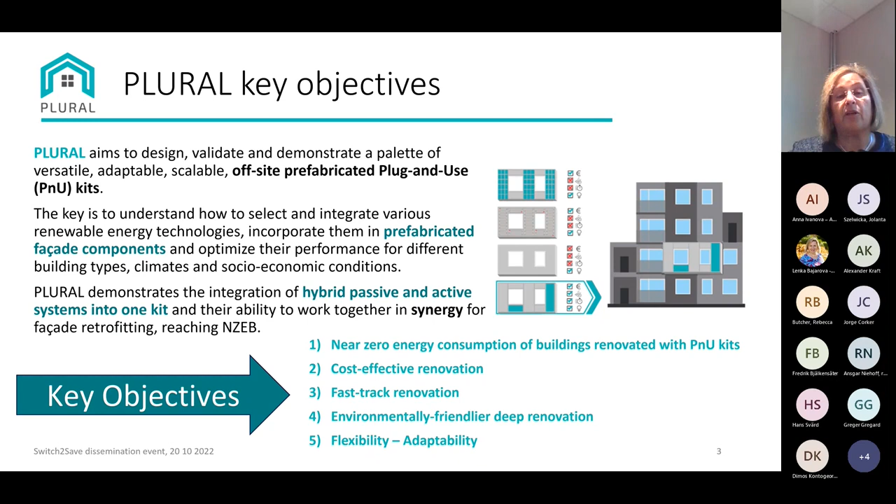We are developing basically three different types of PnU kits, plug and use kits. One is called Smart Wall, the ConExWall, which combines a wood facade with external wall heating and cooling system, and the hybrid wall, which is based on a folding facade that integrates an advanced heat and cool recovery kit. I will show briefly to you in a minute how these kits look.

In parallel, we are developing a digital platform which integrates the BIM models of the demonstration buildings with the specific technical characteristics of the PnU kits and key performance indicators that are developed as part of the project to prioritize the requirements and the needs of different decision makers. Decision makers can be architects, can be real estate, can be the user of the building.

And the aim is to develop also a decision support tool that, taking into account the BIM, the monitoring performance of the building, the BIM models of the IFC files of the kits, and via this decision support tool to be able to support the decision making, which of these technologies is best to be implemented in a building.

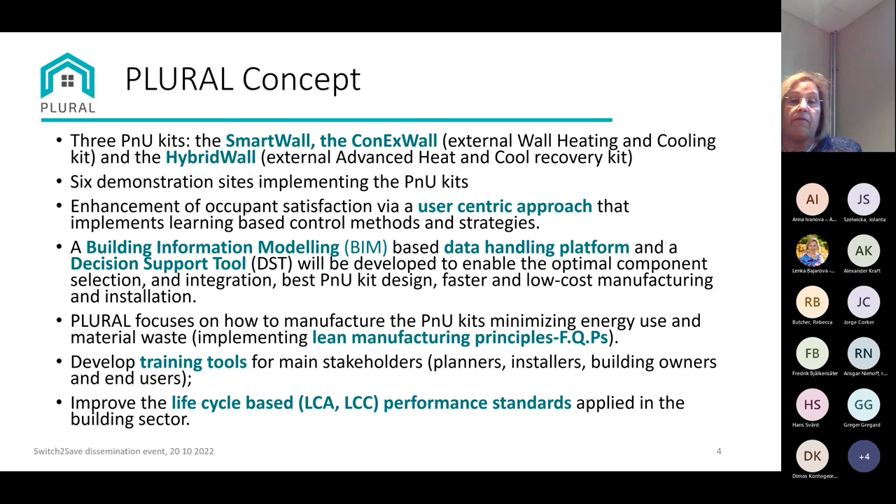Of course, in parallel, we have training tools, and one also specific issue of this project is the manufacturing. We have a whole work package which deals with how to optimize the manufacturing of these prefabricated kits, combining the BIM platform with the manufacturing, giving order from the BIM to the manufacturer what and when and how to manufacture, and of course applying the lean manufacturing principles in the factory quality procedures.

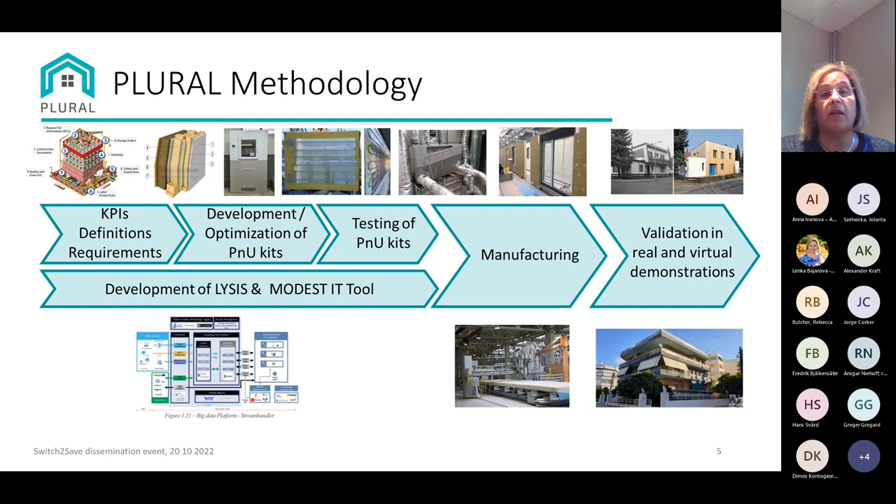So this is an overview of the methodology. We go from the definition of the key performance indicator to the development of the kits, testing, manufacturing, and validation in real demonstrators. This is an overview of the three kits, the smart wall, which you see on the top.

It's a multi-component kit based on a metal frame that integrates a PV panel together with a fan coil and a smart window, which I will talk a little bit more about in the next slides, plus a control system, which we call control toolbox. So the control system takes into account the indoor conditions, gives order to the heat pump that drives the fan coil to switch on or off, and also to the smart window, and of course takes the power from the integrated PV panels.

This module can be produced in different forms, with or without window, with door, plain, and can be used indoor or outdoor. The one you see in the middle, the so-called hybrid wall, is based on a commercial technology of a Spanish company called Denvelopes.

This is Denvelopes, which produces folding facades. What you see here in blue and light green, or the beige and red, are panels that are folding, and they are transported folded to the building site, and then they are unfolded and they go on a frame, and they create a facade

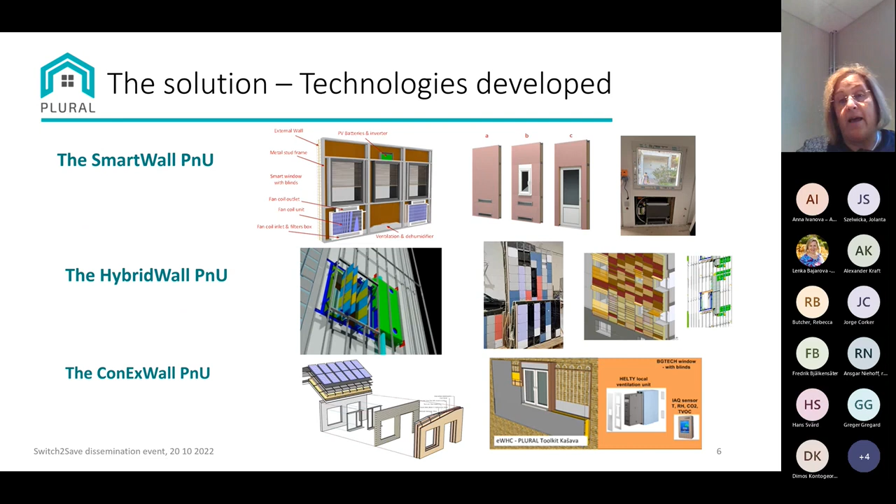Fitting a prefabricated module like the ones we are developing to the actual building is really a challenge in terms of dimensions, hanging, transportation, a lot of small things that have to be taken into account. And I can tell you that BIM helps a lot in this direction, because you can have all the information you need. And for the renovation buildings that we have, all the buildings have been scanned with 3D laser scanning technologies. We created the point clouds, and then we created the BIM out of this, and out of this BIM, we gave instructions to the manufacturers on how to manufacture these prefabricated kits.

Now, probably it's a little bit more interesting for us as part of the Switch2Save project to see a little bit what we do in terms of smart windows. We have a partner who is developing a technology of a triple pane low E window, where they place the anti-reflective coating in different locations within the triple pane, and they circulate air, which is driven from the outside, within the panes, and in this way they can save a significant amount of energy. You see on the top picture the inlet and the outlet of the ventilation which goes through the panes of the window.

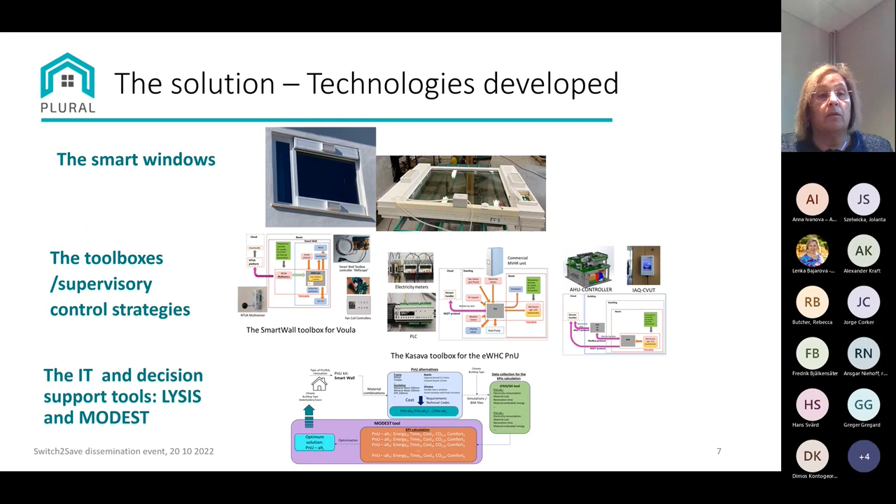Apart from this, we integrate in all the windows heat recovery systems and the ventilation systems. In the middle, you see a representation of the so-called toolboxes, which are necessary for all these kits. And these are the ones that combine the control of the panels plus the control of the building, and they try to make them collaborate. And the IT tools, I don't want to take too much time.

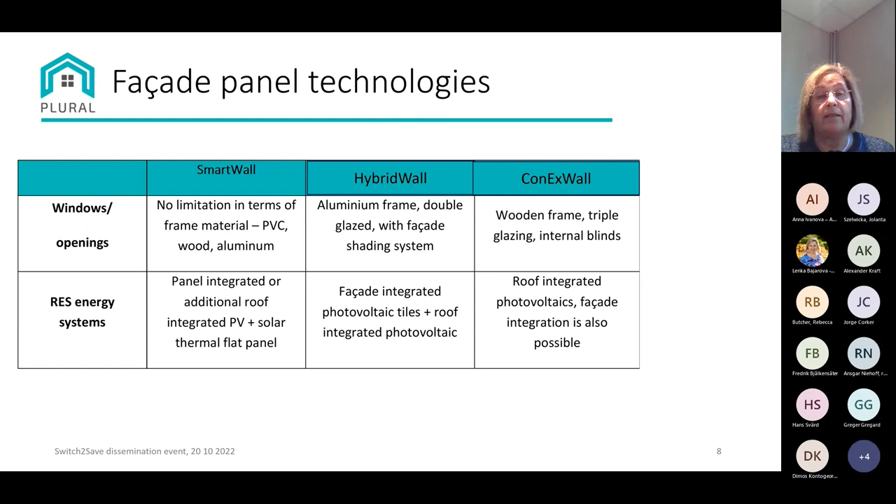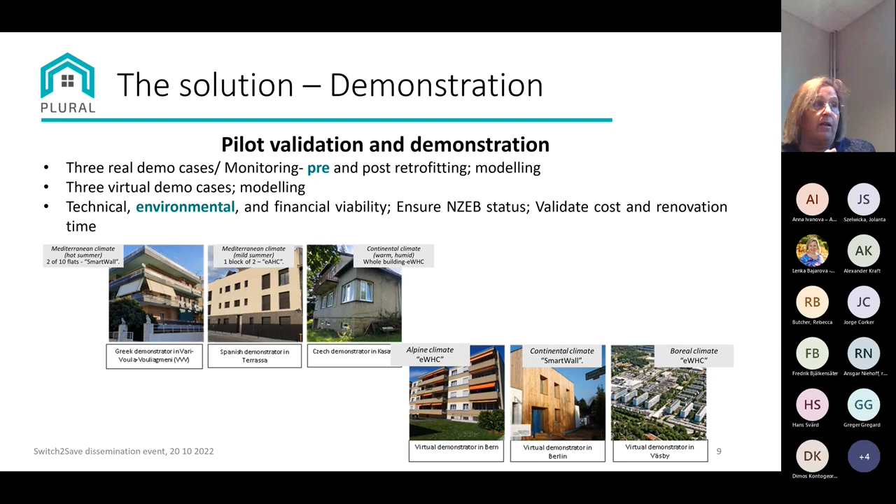And last but not least, we have a big demonstration site in Sweden, Väsby, which as far as I know, it's an area which is kind of protected. It's a typology of buildings built in the late 70s. And there we are going to install again the prefabricated wooden facade with the hydronic system because of the weather conditions. So as I said before, each of these PnU kits addresses different climatic conditions and different building typologies.

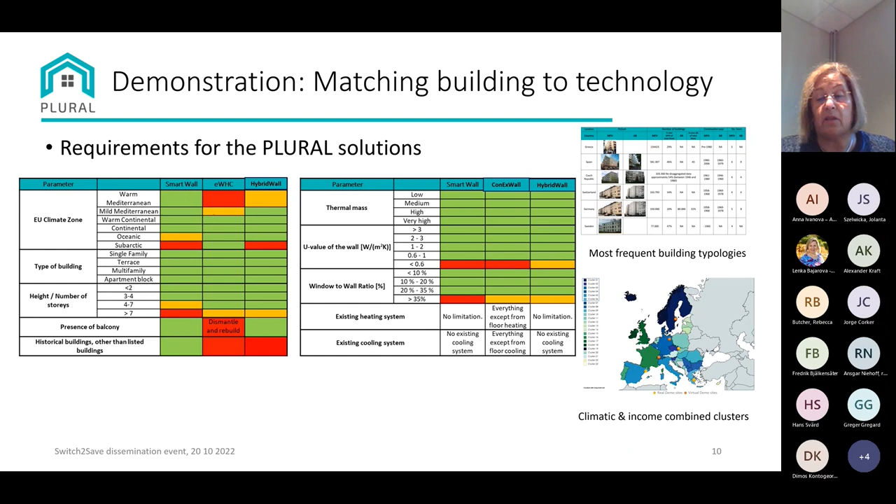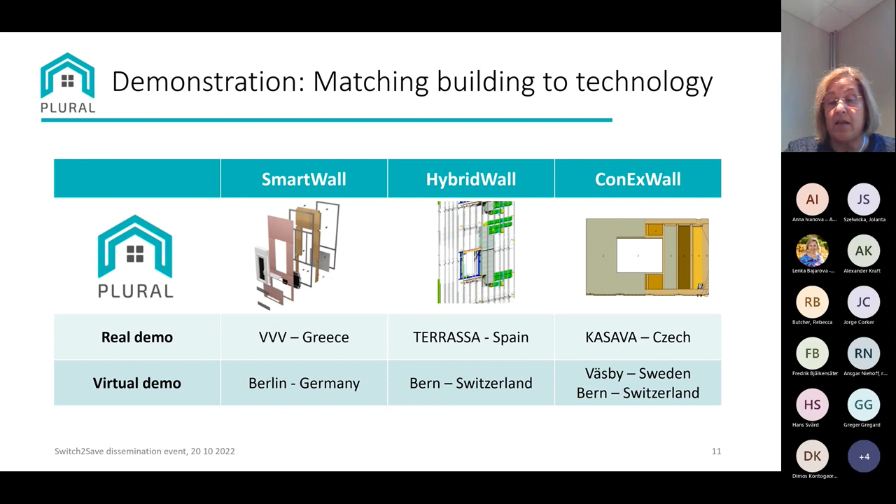This is a pictorial representation of what I said before in terms of installation of the 3 different PnU kits to the real and the replication demonstrators. A few representative examples of what we do in the frame of the project. We have a very extensive testing campaign where we look at the building physics and the thermal performance of these PnU kits via measurements and simulations.

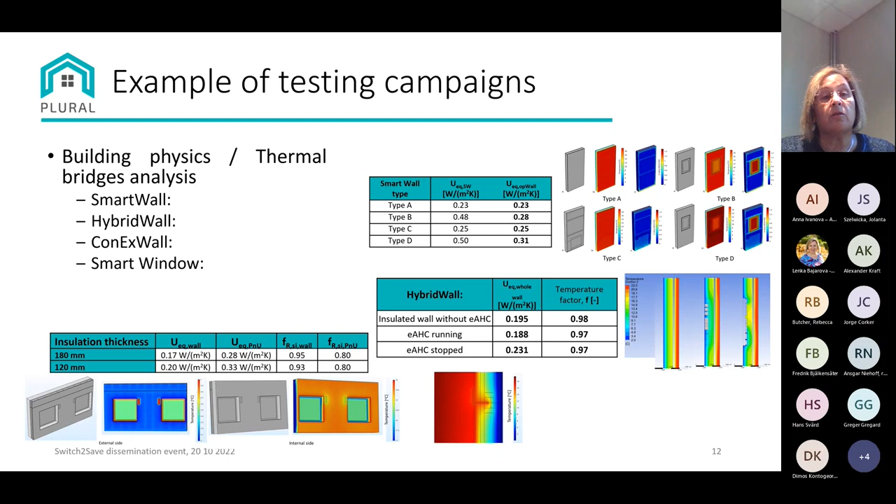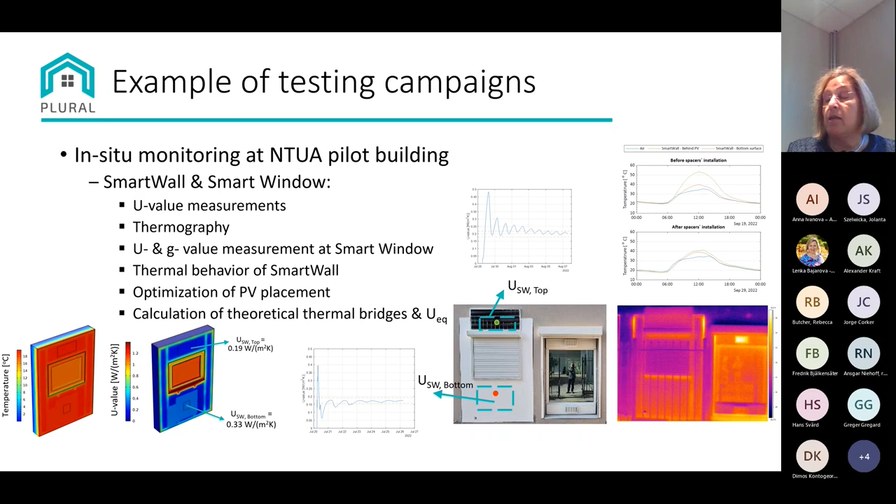We also do in situ monitoring in different pilots in different countries, in Greece, in the Czech Republic, and in Spain. We also look at the statics and the earthquake performance as well as the fire performance of these PnU kits in order to be compatible with the regulations of each country. Take into account that installing these prefabricated kits in buildings and leaving them there, they should comply with all the local regulations, although they are not mass manufactured at the moment, at least.

And as part of the project, we have developed an extensive list of key performance indicators that cover the energy performance, the thermal and visual comfort, time, cost, and environmental parameters. And this extended list of KPIs is a public deliverable of the project, can be downloaded from the project site, and can be used as a guideline for several projects to establish key parameters that need to be monitored in a building in terms of this classification: technical, environmental, economic, and social.

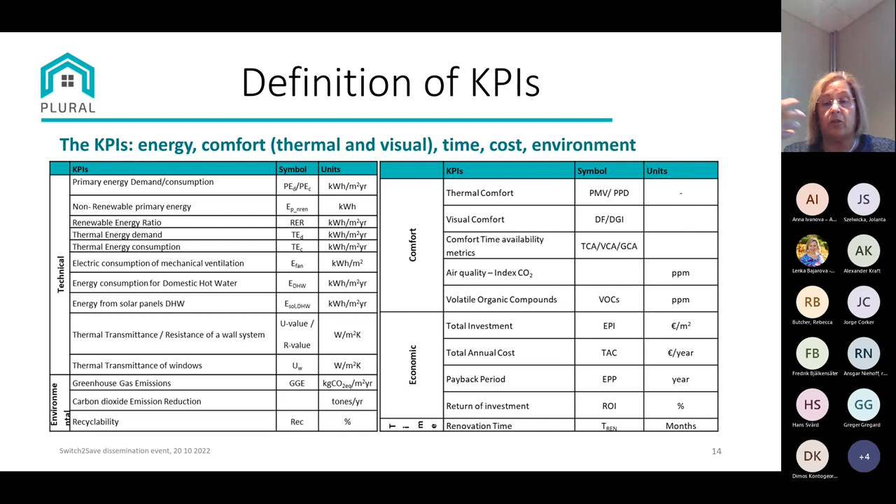For our project, these KPIs are going to be calculated on the IT platform that we have, and the values that we will get will be used for prioritizing alternative scenarios based on the interest of different stakeholders. And last but not least, these are the target KPIs that were set by the Commission.

You can see here that our main target is to demonstrate that the buildings after the renovation will be NZEB buildings, which means that the U value of the overall kit must be below 0.23 watts per square meter Kelvin. This already has been achieved in the design of the PnU kits. Depending on the country, the primary energy consumption must be definitely well below the 60 kilowatt hours per square meter.

This is also confirmed. One of the targets is to be 58% cost efficient, i.e. reducing the costs for retrofitting by 58%, which is a huge challenge, taking into account the current doubling and tripling of material prices. Fast track renovation. Here also we have to prove that we can reduce the time for renovation by 50%. How are we intending to do this?

Through the control of the manufacturing and the BIM, combining the manufacturing with the BIM requirements and the sequence of the renovation, you can save up to 30% of the time needed, plus another 20% comes due to the fast installation on site. Actually, for the smart wall, which we have installed the prototype, it only took 10 minutes to install it, which is really a big achievement. The whole wall came and went on the existing wall, and it was really very nice.

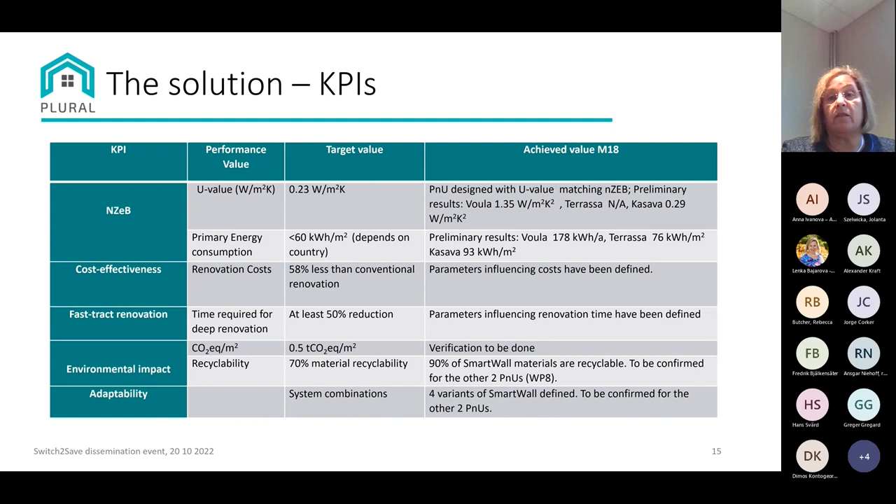Environmental impact, of course. Most of the materials that are used to construct these PnU kits are recyclable, and it's a target to reach up to 70%. And adaptability, I think I already highlighted via this presentation that these PnU kits can be designed according to the requirements of the building. This was a very fast presentation, and maybe I created more questions than answered.